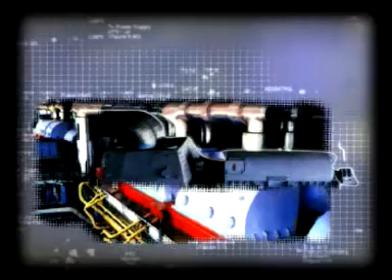Availability of energy is one of the main indicators of the scientific and technological level of development of a modern society. Its increase requires continuous exploitation of new power sources. In this regard, an increase in profitability and reliability of power equipment is a key problem facing the power industry. In a number of cases, a solution to this problem is possible through increasing the purity of feed water.

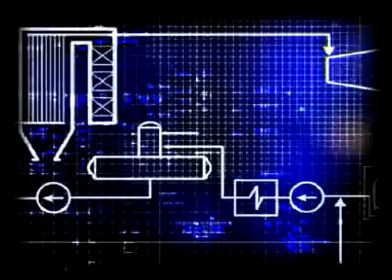This is obtained through more efficient extraction of contaminating ferruginous impurities, one of the main sources of ferric oxide deposits in boilers and the circulatory sections of turbines. The presence of these deposits has a major influence on the reliability and profitability of thermoelectric power plant equipment.

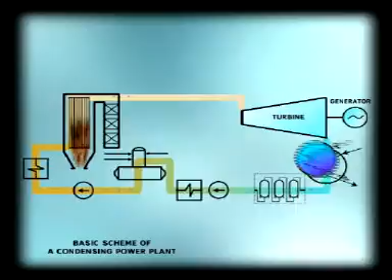Existing methods of steam condensate treatment at thermoelectric power plants cannot avoid the presence of ferruginous impurities, since the relatively pure exhaust turbine steam, after condensation and chemical purification, travels a long way through the pipelines. It proceeds through condensing pumps, low-pressure heaters, deaerators, feed pumps, and only then, after passing through high-pressure heaters, arrives again at the steam generator and turbine. Since practically all equipment and plant pipes are subject to corrosion and wear, condensate in the contour is continuously mixed with ferruginous impurities.

Even if the necessary purity is obtained, the micro-impurities that are present in millions of tons of condensate passing continuously through the steam generator quickly deposit a layer of ferric oxide on the walls of the pipelines. This considerably reduces the heat transfer coefficient of the heating surfaces, leading to their overheating and rupture, as well as increased use of fuel and emergency shutdowns of generators.

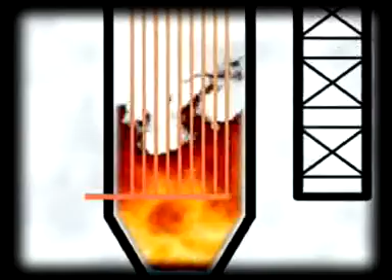In some cases, for example, when a generator is started and the concentration of ferruginous impurities exceeds the norm by 10 or even 100 times, the increase of deposits intensifies considerably and a purification of the contour is necessary. This is accompanied by a discharge of a significant quantity of expensive chemically purified water together with heat down the drain.

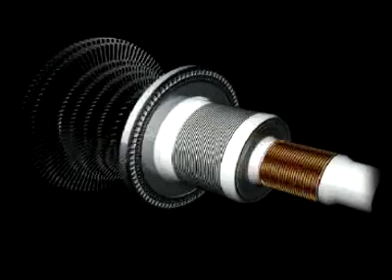Impurities, which have partially passed through the steam generator along with the steam, arrive at the turbine and form a deposit on its blades, which causes a pressure increase in the regulating section, an increase in fuel use, and a decrease in profitability.

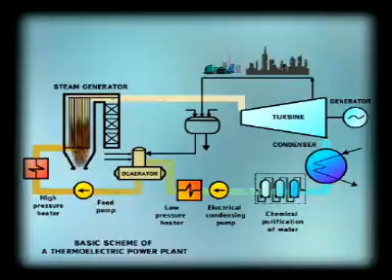A similar situation exists at thermoelectric plants. Here it is aggravated by the fact that consumers of heat return the heat carrier to the plant so contaminated with ferruginous impurities, products of corrosion of tens, maybe hundreds of kilometers of pipelines, that its discharge and consequent considerable economic loss become inevitable.

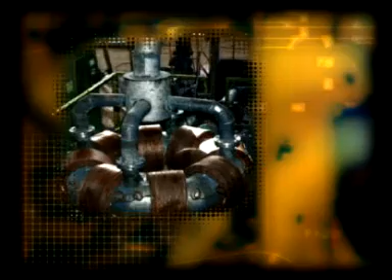Unfortunately, the usual methods of water purification are not designed to extract highly dispersive ferruginous impurities and consequently do not produce the desired effect of extracting iron from condensate. However, a solution to this problem is now possible due to the design of electromagnetic filters, EMFs. These have demonstrated excellent service performance where they have been installed. They are compact, simple in operation, and have a high performance range, up to 1,000 and more tons of condensate per hour.

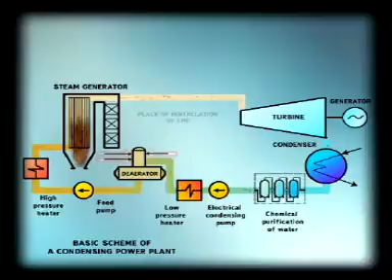Taking into consideration their high efficiency in the extraction of ferruginous impurities, the installation of electromagnetic filters is advantageous at plants that have high ferruginous flows. With current practice at condensing stations, high ferruginous flows occur either in the main flow of condensate after it has passed through a purifying apparatus, or where a flow or several flows arrive at the deaerator. In both cases, the installation of electromagnetic filters is advantageous.

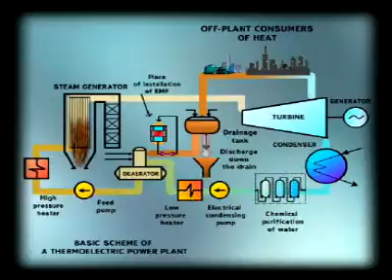A similar situation exists at thermoelectric plants, where purification of condensate in drainage tanks is usually preferred. This means the production condensate returns to the contour and then usually has to be flushed down the drain because it is highly contaminated with ferruginous impurities.

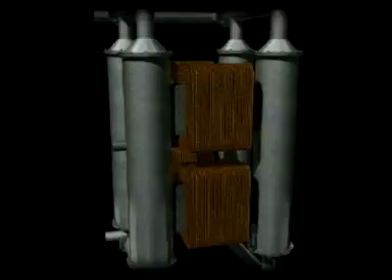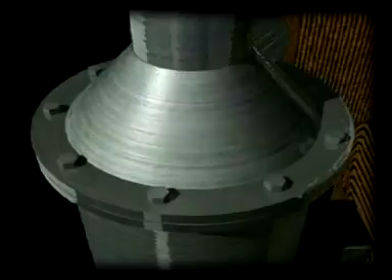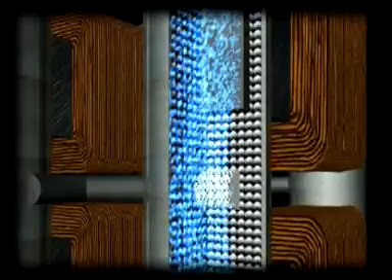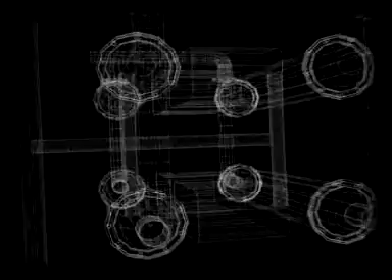So what is an electromagnetic filter? In simple terms, it comprises 4 cases, which are filled with special ferromagnetic filtering granular nozzles. The purifying condensate arrives at the nozzle through the inlet manifolds. Under the influence of a magnetic field created by electromagnets, the ferruginous impurities which contaminate the condensate are deposited on the granular nozzles. The purified condensate continues through pipe bands, returns to the pipeline, and is directed further through the condensate pipe.

At the end of the filtering cycle, the nozzle is partially blocked with deposited impurities and requires cleaning. With electromagnetic filters, cleaning is very easy. The filter is switched out of the system by means of valves, and the purified condensate exits through the bypass pipe.

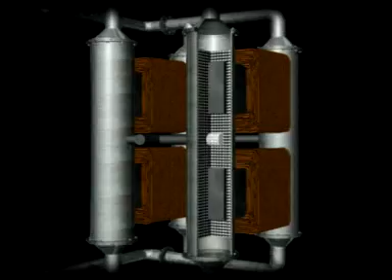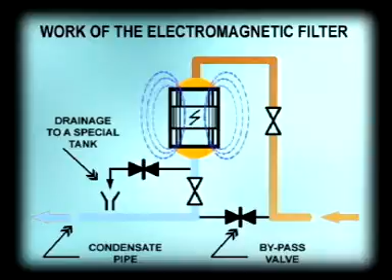Then, the magnetic field is switched off and the nozzle is demagnetized. Nothing then holds the deposited impurities. Within 3–5 minutes, they are washed out by a stream of filtering fluid, which afterwards is directed to a special tank for further purification and recirculation. After that, the magnetic field is switched on again, and the filter is now used again for cleaning. Usually, a regeneration of EMFs takes less than 5 to 7 minutes.

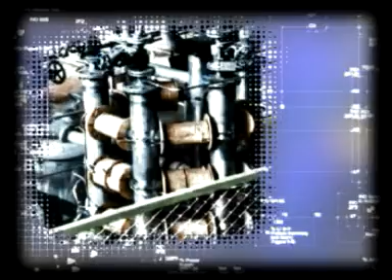Electromagnetic filters are small. For example, an electromagnetic filter of an average output, 500 cubic meters per hour, together with its safety zone, occupies about 15–20 square meters and provides working efficiency in terms of purification of magnetizable impurities of up to 95–98%. Deposition of fractions less than 0.1 microns. Temperature range of purified media up to 500 degrees centigrade.

High efficiency of operational parameters. The power consumption is up to 0.4 kilowatts with the filter output at 1 ton per hour. Safe use in premises where the danger of explosion exists, with the use of magnetizing systems with permanent magnets.

In conclusion, electromagnetic filters give high productivity and efficiency of purification from ferromagnetic impurities, are small in size and simple to maintain. They offer a successful solution to the challenge of purification in the power industry through reduction of the content of ferric oxide impurities in condensate and feed water of steam generators by a factor of 2–3, decreasing the quantity of ferric oxide deposits on steam generating surfaces. This significantly slows down the rate of corrosion processes, prevents overheating and ruptures of pipelines, improves heat exchange and saves fuel. Electromagnetic filters also offer great opportunities in other industries.

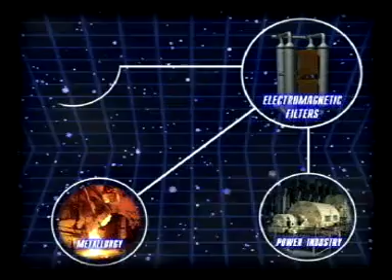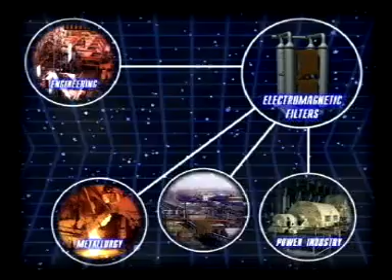Metallurgy. Reduction by 5–10 times of the scale content of circulating and drain waters. Improvement of the quality of hot-rolled wares and the removal of ferric oxide aerosol from the air of industrial premises. Engineering. Elimination of ferruginous wear and treatment products of oils, lubricants and cooling fluids, increased service life of equipment parts and components, improvement of the quality of cold-rolled sheet.

Oil and gas industry. Expeditious purification of gas and oil products transported over long distances, and the purification of highly dispersive products of pipeline corrosion with minimal hydraulic losses, preventing obstruction of customers' equipment and pumping station equipment. Chemical industry. Improvement of product quality, in particular the reduction of ferruginous impurities by 2-3 times, thus increasing the service life of equipment. Reduction of catalytic contamination and increase in the degree of chemical synthesis by 20-40%.